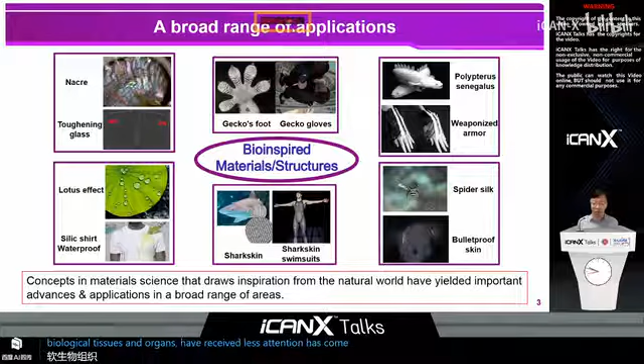On the other hand, the non-infectious chronic diseases have been the leading cause of deaths globally for many years. In 2012, these diseases caused 68% of all deaths, according to the report of the World Health Organization. In this regard, the long-term real-time monitoring of physiological signals is very crucial because they can provide quantitative feedback for the early stage prevention of these diseases. For this purpose, the functional devices are usually required to be conformably integrated with human organs. Therefore, the 3D functional microstructures with similar shapes and mechanical properties to those of biological systems can provide an important platform to interface and merge biology with physical components.

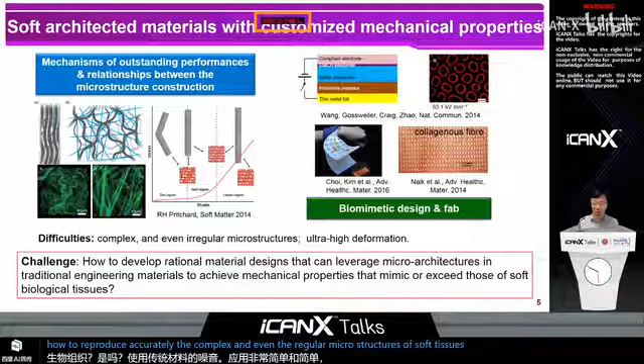One of the technological challenges we face is in the development of soft architected materials with customized mechanical properties. In particular, how can we develop rational material designs that can utilize microarchitectures in traditional materials so as to achieve mechanical properties that mimic or exceed those of soft biological tissues? It's noteworthy that by using conventional engineering materials, the fabrication is highly simplified and more straightforward. But the difficulties here include how to reproduce accurately the complex and even irregular microstructures of soft tissues, as well as how to understand the structure-property relationship.

Since the third dimension can provide brand new opportunities, 3D micro and nano electronic devices have already become an important research direction in the era of post-Moore's law. Here, a grand challenge is in the development of manufacturing approaches that can enable the formation of complex flexible 3D mesostructures in inorganic semiconductors and other high-performance materials. Single crystal silicon is a good example, which represents the hard material of the current information industries.

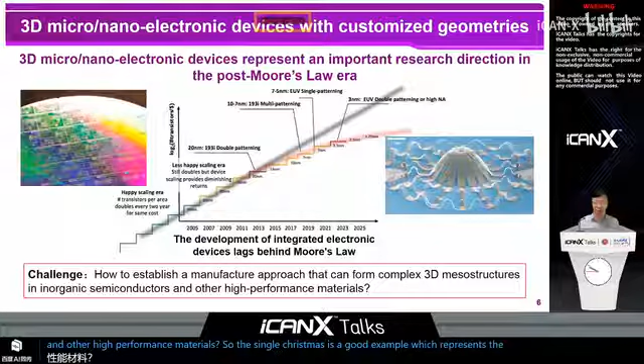To address these challenges, my group has been engaged in the development of flexible mesostructure technologies through the use of mechanics principles and highly interdisciplinary studies. According to these technologies, we have developed unusual soft architected materials that can reproduce and even exceed the mechanical properties of soft biological tissues. We have also developed a mechanics-guided assembly approach that can enable the construction of 3D flexible electronics with brand new functions.

Here I will start with the introduction to the soft architected materials with customized mechanical properties. In particular, we have developed a class of soft network designs and manufacture approaches. The key idea is to incorporate strategically designed filamentary microstructures into the lattice network and to utilize the composition design and geometrical optimization to tune the effective mechanical properties of the soft network.

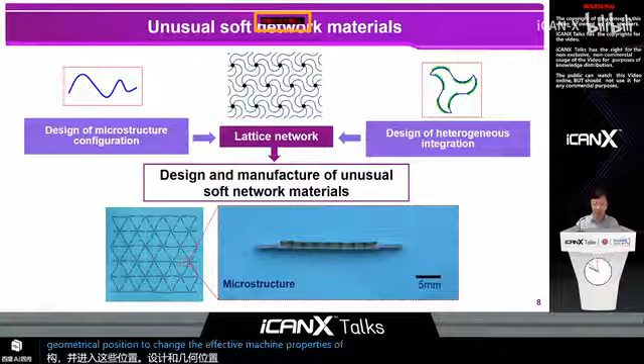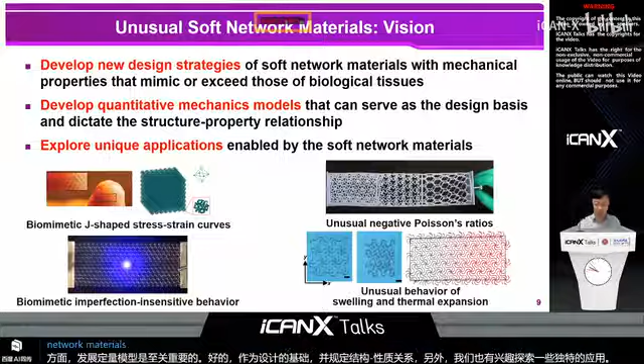On one hand, we have developed design strategies to achieve biomimetic properties as well as unusual properties that do not exist in natural materials. The examples of these properties include the biomimetic J-shaped stress strain curves, the imperfection-insensitive behavior, as well as unusual responses of swelling, thermal expansion, and Poisson's ratio. On the other hand, it is crucial to develop quantitative mechanics models that can serve as the design basis and dictate the structure-property relationship. Additionally, we are also interested in exploring some unique applications enabled by these soft network materials. Great. So let me first show you the bio-inspired network designs.

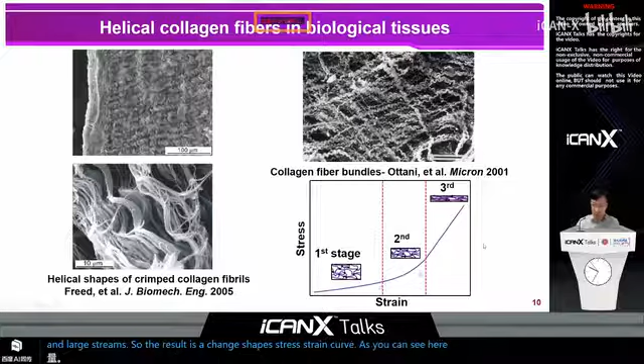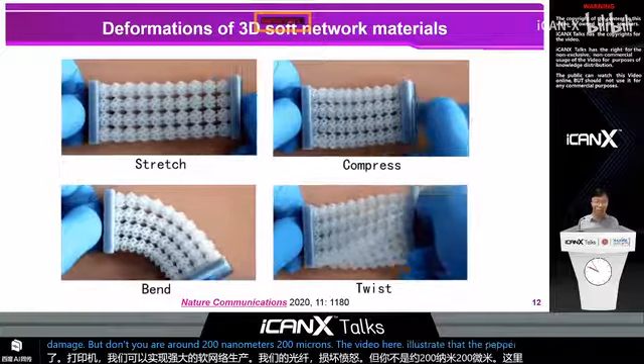So here, with the use of the commercial PolyJet 3D printer, we can achieve a robust production of the soft network materials with a fiber diameter down to around 200 microns. The video here illustrates that the fabricated soft network material can undergo large levels of stretching, compression, bending, and twisting. And during this loading and unloading process, the microstructure deformations are basically elastic and reversible, according to our mechanics modeling.

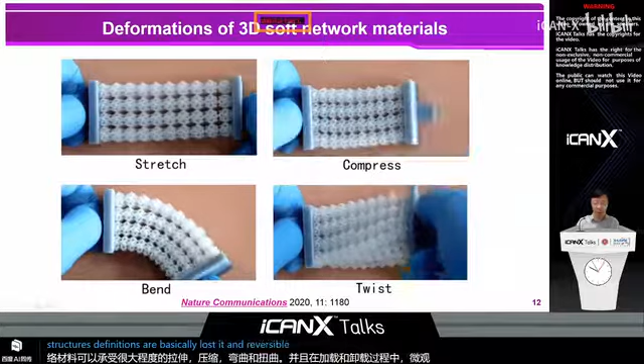Actually, this kind of soft network design can provide access to a broad range of J-shaped stress strain curves, and our mechanics modeling allows us a clear understanding of the structure property relationship. And with this, we can perform inverse design of the soft network material to reproduce accurately the stress strain curves of biological tissues. So here are 2 examples. On the top, if you look at the black curve here, this corresponds to the stress strain curve of a real heart muscle. The blue dots here represents the results of artificial tissues based on our network design. So you can see good agreements between our artificial tissues and the real heart muscle.

And on the bottom shows another example for the right ventricular myocardium of an adult rat. And here, the mechanical responses are very different between the circumferential and the longitudinal directions. And even for such anisotropic nonlinear stress strain curves, the artificial tissues based on our network design can still reproduce accurately the stress strain curves along both directions.

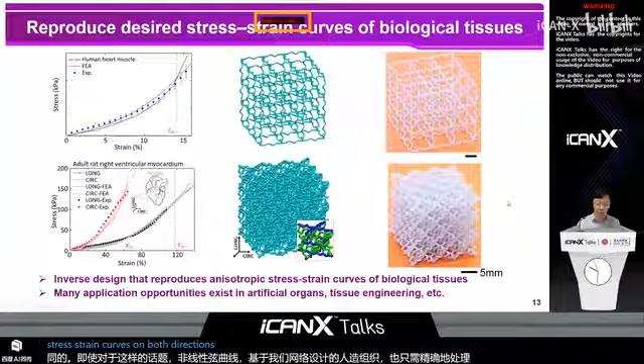If we degenerate the 3D helical structures into 2D, we are able to create a class of 2-dimensional network materials. And this kind of 2D network material can be tailored to reproduce the stress strain curves of film-like tissues, like animal skin. And this kind of 2D network material can be fabricated much more easily than the 3D networks. So excluding the 3D printing, the photolithography and the laser cutting technologies can be also used, and either the polymers or the metals can be exploited as a solid material. So here is an example of the fabricated network wrapped onto the tip of the thumb.

Actually, human skins show different mechanical properties at different locations or for people of different ages. For example, if you compare your skin at the abdominal region with your skin at your back, you will see that the skin at your abdominal region is much softer, and you need to apply a very large strain before it reaches its hardening region. Instead, if you stretch your skin at your back, you just need to stretch it very slightly, and then you will step into the hardening region. So it's a very big difference.

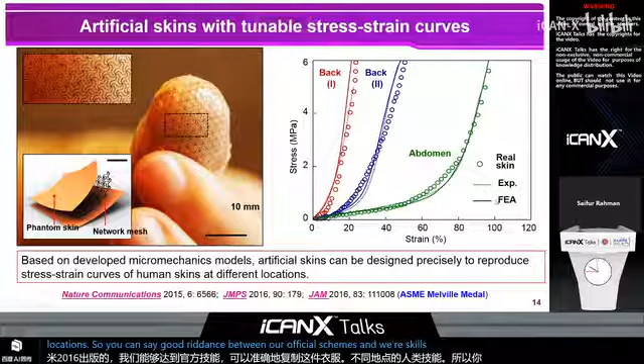So this kind of soft network material can be used in a skin-like ECG sensor to provide a good platform for stretchable biomedical devices. And by doing so, we can achieve not only a conformal contact with the skin, but also biomimetic properties. Another device demonstration is shown on the bottom. Here we can use the antenna to wirelessly control the release of responsive hydrogel into the surrounding tissues, into the surrounding environment. And here the mechanism is electromagnetic coupling.

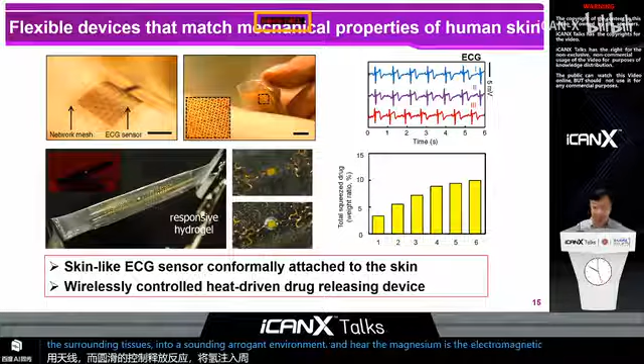Actually, this kind of soft network material also shows biomimetic imperfection insensitive behavior. We all know that with a brittle solid material, there will be a strong stress concentration around a hole. And this will result in a very big reduction in the strength, typically around 60% of the original strength for ideally brittle materials. And the stretchability is also reduced significantly. Here we show that even when we use the macroscopically brittle material to construct this soft network material, both the strength and the stretchability are quite imperfection insensitive.

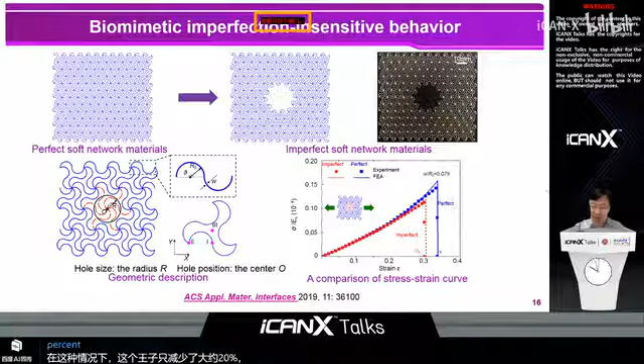So we have studied a range of different circular holes with different sizes and different positions, and here is a representative result. As you can see here, the blue color denotes the stress-strain curves of a perfect network material, and the red color denotes the stress-strain curves for an imperfect network with 6 missing microstructures in the center. In this condition, the strength is only reduced by around 20%, and the stretchability is reduced by only 10%. So in practical applications related to stretchable electronics, we usually want to utilize some holes in the network to accommodate some functional chips or other electronic components.

So here is the demonstration of a stretchable LED device based on the soft conducting network. And this device can offer a stretchability of around 14.2%. This value is very close to the 15% of the perfect network. And this device also offers very stable mechanical and electrical properties.

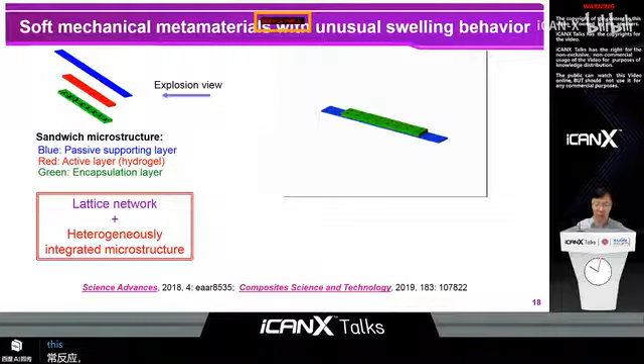Beyond the biomimetic properties, we also want to achieve some unusual properties that do not exist in natural materials. One of the properties we studied is the unusual response of swelling, such as a large negative swelling. This requires the material to shrink largely during water absorption. And here the key idea is to incorporate heterogeneously integrated microstructures into the lattice network. This video shows the construction of this composite network. In short, we want to devise a kind of filamentary microstructure that shrinks largely during water absorption.

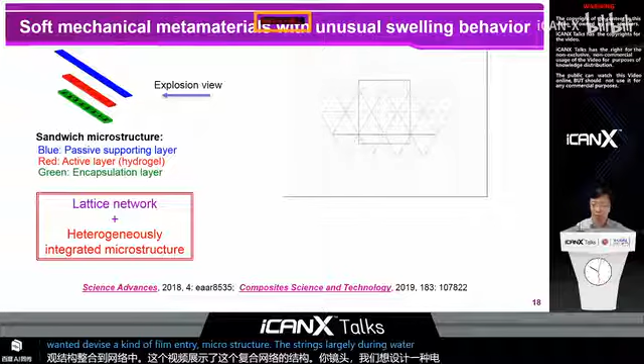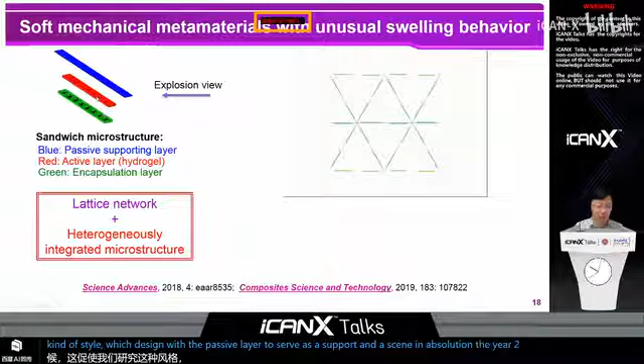And this drives us to look into this kind of sandwich design with a passive layer to serve as a support and a thin encapsulation layer to ensure a good interface between the hydrogel and the polymer support. Such a sandwich design can easily transform the swelling deformations of the hydrogel into large bending deformations, and therefore this can achieve a large reduction in the end-to-end distance. And this kind of composite network can be fabricated using a multi-material 3D printer. So you can use a commercial 3D printer to achieve this production.

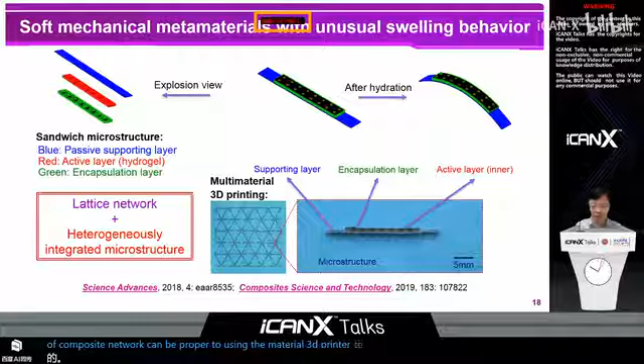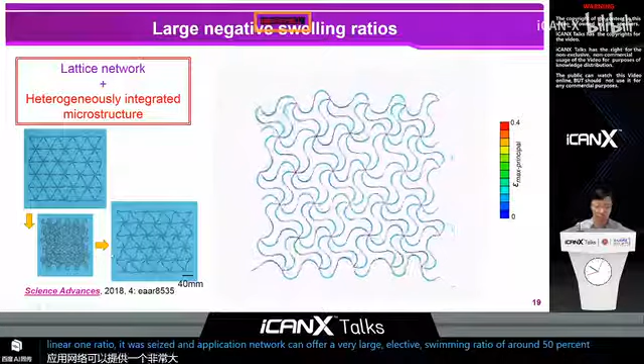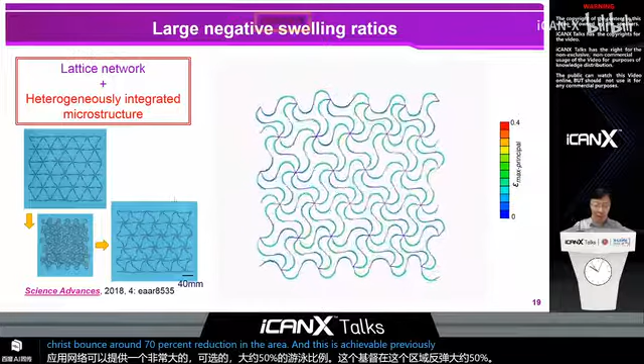And this slide shows the simulated deformation process during water absorption and dehydration. You can see the predicted deformed configurations agree very well with the optical images in experiments. And if you calculate the value of the linear swelling ratio, you will see that this fabricated network can offer a very large negative swelling ratio of around 50%. This corresponds to around a 70% reduction in the area, and this was unachievable previously. And when you do dehydration, this kind of structure can recover almost fully to the initial state. This indicates good reversibility.

Good. And based on this kind of soft network design, we are also able to achieve anisotropic swelling behavior by using heterogeneous microstructures in the network. So here is an example. If you put hydrogels only along the diagonal directions, you can achieve a kind of unidirectional shrinkage along the x direction and no shrinkage or expansion along the y direction.

If you describe this kind of swelling path in the space of strain components, epsilon x and epsilon y, we can do a comparison between the current metamaterial design with the traditional engineering materials as well as previous metamaterial design. So actually, the traditional engineering materials only offer a very small magnitude of swelling ratios, typically within this region. The well-synthesized hydrogels can offer very large swelling ratio. It can go beyond 150%, but typically in an isotropic manner. So it is in this path.

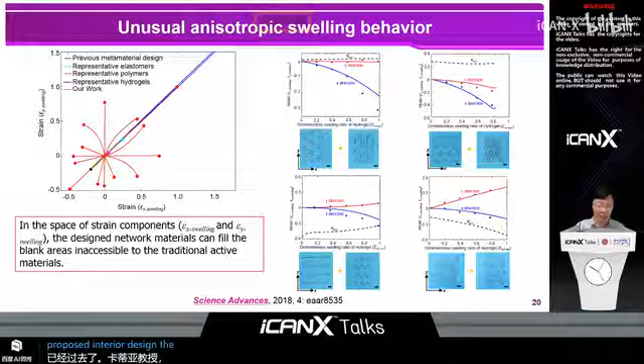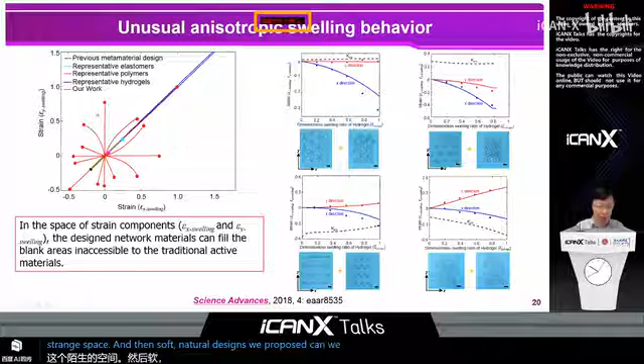Professor Katia Bertoldi's group at Harvard proposed a metamaterial design that can achieve an isotropic effective swelling ratio of around 20%. Therefore, there are many blank areas in this strain space, and the soft network designs we propose can well fill almost all of those blank areas. So this indicates the capability of our soft composite network design.

The above design concept of heterogeneously integrated soft microstructures can also be extended to achieve unusual modes of thermal expansion. Here you need to introduce two materials with a relatively large difference in the coefficient of thermal expansion. And we choose PI and PMMA as the two constituent materials. And in terms of the fabrication, it could be a challenge, especially when you want to achieve a very small feature size of around several tens of microns. But due to the time limit, I will skip the details of the fabrication and just show you some results.

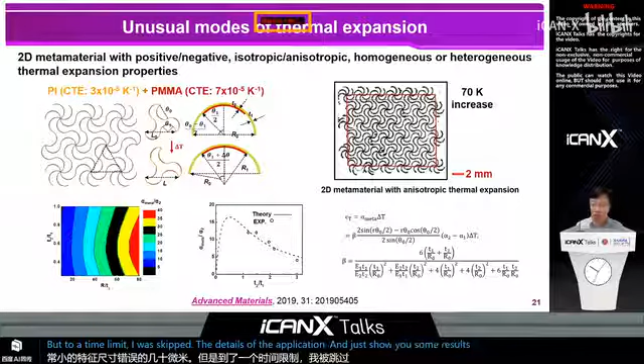So on the right, you can see this kind of metamaterial that can achieve a unidirectional thermal expansion. So there is no shrinkage or expansion along the horizontal direction. By introducing some non-uniform arrangement of the microstructures, we can also achieve this kind of thermally induced pure shearing, rotation plus shearing, as well as thermally induced bending. And most of these behaviors do not exist in natural materials as well.

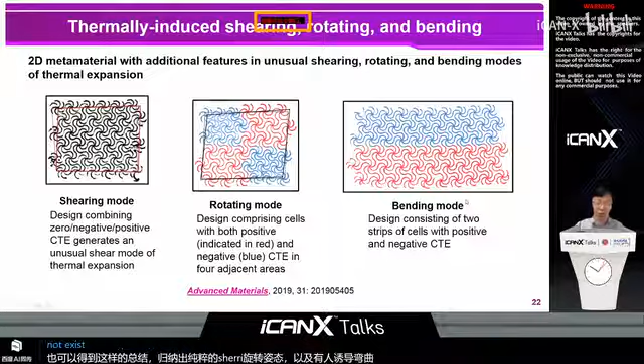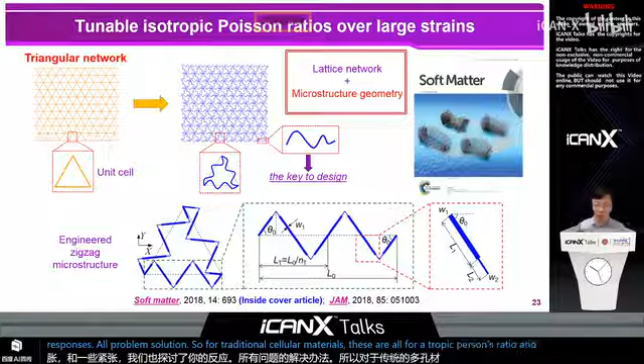Excluding the unusual responses of swelling and thermal expansion, we have also explored the unusual responses of Poisson's ratio. So for traditional cellular materials, they either offer isotropic Poisson's ratio at small strains or anisotropic Poisson's ratio at large strains. And it's very difficult to combine the two features together in a tunable manner. So here we have proposed to incorporate arbitrarily shaped microstructures into the lattice network, which allows us to achieve tunable isotropic Poisson's ratios at large strains.

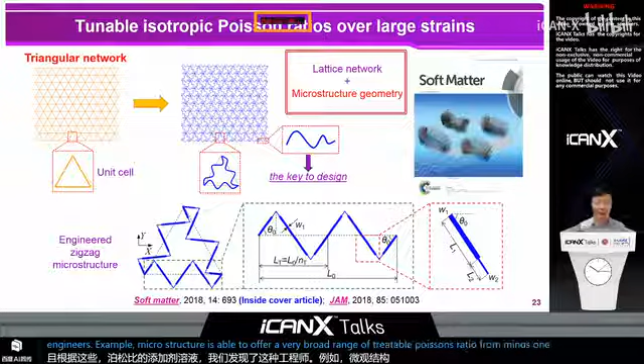And actually, we have developed a mechanics model that gives an analytical solution to the linear Poisson's ratio for this general network material. And according to this analytical solution of the Poisson's ratio, we found that this kind of engineered zigzag microstructure is able to offer a very broad range of tunable Poisson's ratio from -1 to 1 in an isotropic manner. And this is also unachievable previously. Let me show you a video about what we can achieve.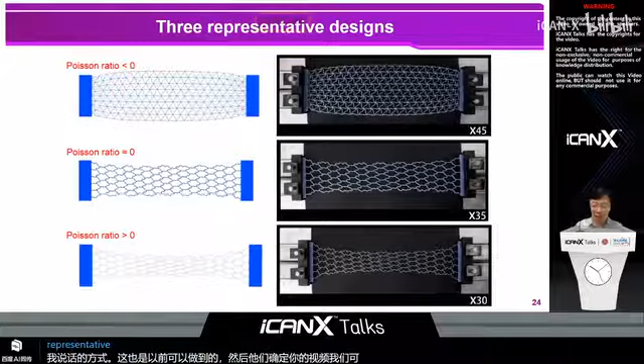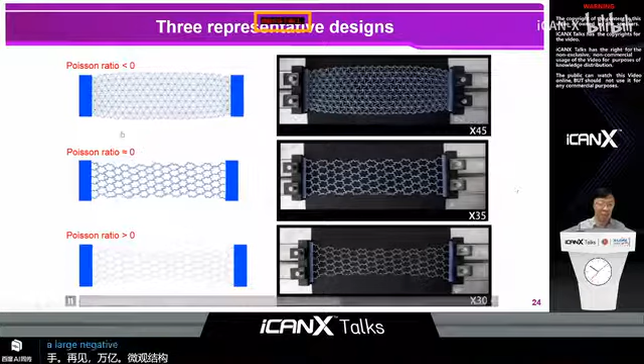And here are 3 representative designs we studied both experimentally and theoretically. So by tuning the microstructure geometries, we can achieve a large negative Poisson's ratio of -0.5, 0 Poisson's ratio, as well as a positive Poisson's ratio of about 0.5.

And with this network design, we are also able to achieve a kind of artificial cat skin. So here we find that the cat skin at a certain location also shows a kind of negative Poisson's ratio, as you can see here. And by using our soft network design, we can reproduce not only the nonlinear transverse strain, but also the J-shaped stress strain curve of real cat skin.

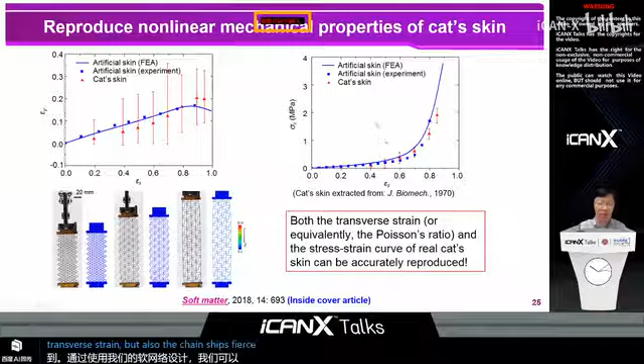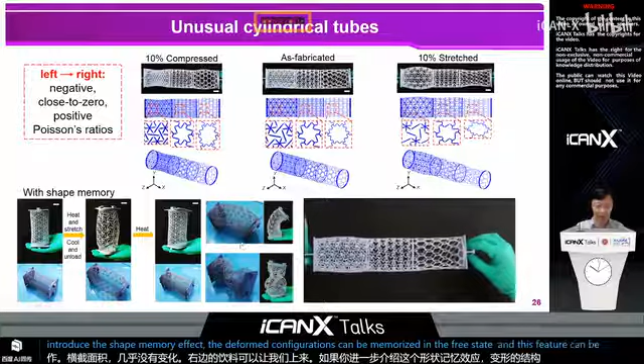And this slide shows the use of this soft network material to create an unusual cylindrical tube. So for this kind of cylindrical tube, when you stretch it, the left segment expands in the cross-section, the middle part keeps the cross-sectional area almost unchanged, and the right part shrinks along the circumference. If you further introduce the shape memory effect, the deformed configurations can be memorized in the freestanding state. And this feature can be utilized in thermally-triggered medical stents.

Okay, I will give a short summary of the first part of the lecture. So in conclusion, we have incorporated strategically designed microstructures into the lattice network with proper geometries and heterogeneous integration. And the result is a class of soft network material designs that can achieve both biomimetic properties and unusual properties of swelling, thermal expansion, and Poisson's ratio. We believe that there are many application opportunities in biomedical devices and tissue engineering.

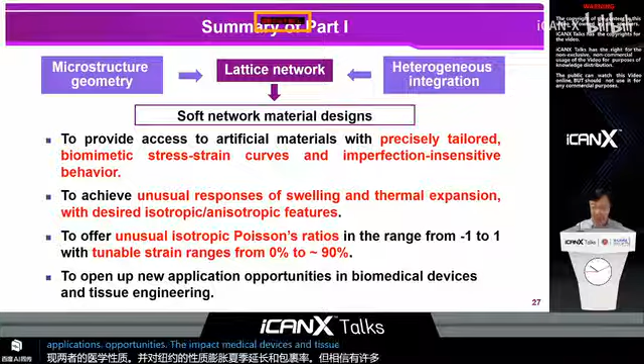Then it comes to the second part of the lecture. And here, an important mission is to address the challenge in the fabrication and manufacture of flexible 3D microelectronics. To address this challenge, we started relevant studies from 2012, and now we have established an approach distinct from all of the previous ones. So the key idea is we did not abandon the well-established microelectronic technologies. Instead, we go one step further beyond the traditional 2D fabrication, and we exploit the compressive buckling to deform easily patterned 2D thin films into well-controlled 3D architectures.

After devising this approach, an important aspect involves the exploration of the class of 3D geometries accessible to this mechanics-guided approach. Another fundamental question is, how can we develop quantitative models that can serve as the basis of inverse 3D design? In addition to developing the approach itself, we are also interested in exploring the unique applications enabled by this approach. So I will illustrate the process of this assembly on this slide.

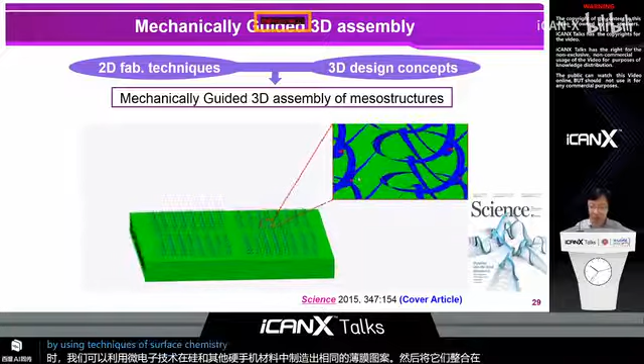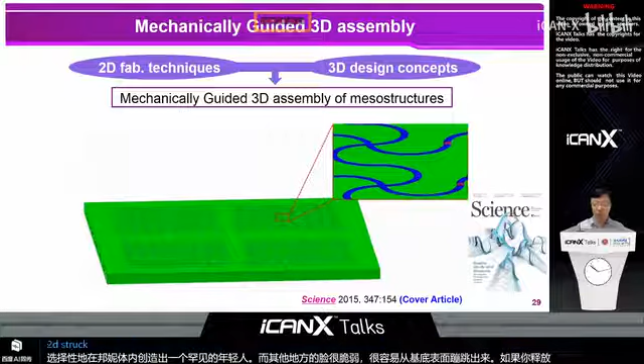Firstly, we use a soft elastomer to serve as the platform, and we apply a biaxial pre-stretch to the substrate. And this platform will provide the forces required to induce the compressive buckling. Meanwhile, we can use the microelectronic technologies to create patterned 2D thin films in silicon and other high-performance materials, and then we integrate them together. And by using techniques of surface chemistry, we can create strong covalent bonding selectively only at the bonding sites. The other places are simply weak interface and can pop up easily from the substrate surface if you release the pre-strain in the substrate. And then the 2D structure can be transformed into well-controlled 3D architectures. Since the microelectronic technologies can do mass production and thousands of components can be fabricated on the same batch, our 3D approach can also assemble thousands of 3D mesostructures at the same time.

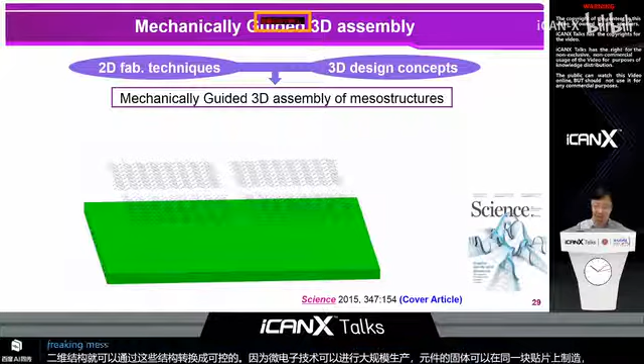A powerful aspect of this approach is the broad range of applicable material types. In addition to the single crystal silicon, this approach also works well for metals, polymers, plastics, ceramics, piezoelectric materials, as well as flexible printed circuit boards. So if you do two-dimensional fabrication of the integrated circuits, the entire circuits can be transformed into 3D at the same time.

Another powerful aspect of this approach is the broad range of applicable length scales. So unlike most of the other approaches, this mechanics-guided approach works perfectly well over a wide range of length scales, from submicron scale to meter scale. In order to provide some intuitional impressions, we compare our assembled structures with some objects in real life. So here, the assembled structure at the submicron scale has a comparable dimension to blood cells. Adjacent to this microscale 3D structure sits a human hair. So you can see a human hair here. For millimeter and centimeter scale structures, we use a coin and a pen as a reference respectively. And the rightmost panel shows the largest structure we have achieved, which is comparable to a human body.

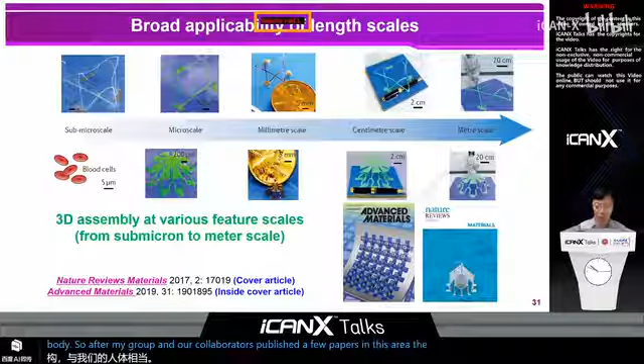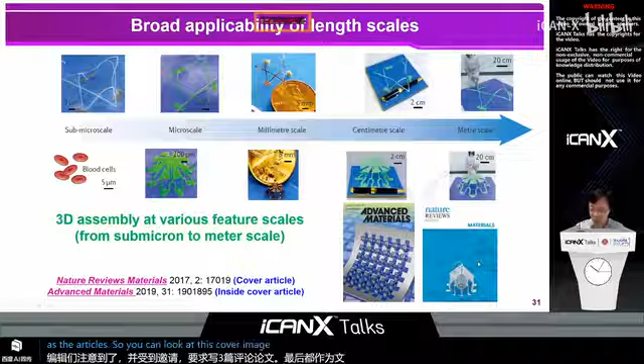So after my group and our collaborators published a few papers in this area, these works were quickly noticed by the editors of Nature Reviews Materials and Advanced Materials. And they invited us to write 2 review papers, and both were eventually published as cover articles. So if you look at this cover image, you can see that we actually use a kirigami design to achieve this tiger at the micro scale. You can imagine that this tiger is completely flat at the initial state, and we simply use the compressive buckling to trigger its pop-up into this tiger at the micro scale.

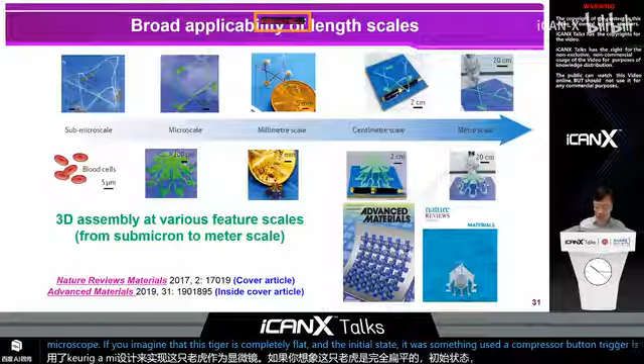In this direction, the research of my group over the last few years has been focusing on 4 different aspects, including conceiving some new design concepts, developing robust design methods, inventing assembly instruments, as well as exploring new applications. In specific, the design concepts involve the designs of 2D precursors, the design of deformable substrate, and how you integrate them together. The development of design methods aims to answer the question of how to map the target 3D configuration onto the initial 2D patterns. The assembly instruments involve the loading and characterization of the soft-hard interface, the multi-field assembly, as well as nanoscale assembly. And in terms of the applications, we have explored the development of unusual electromagnetic devices, MEMS, and biomedical devices. So due to the time limit, I will show you some representative results in these different aspects.

Okay, after we published the first paper of this area in Science in 2015, an intuitive idea is to introduce and extend this idea to the assembly of 3D membranes or 3D curvy surfaces. However, we noticed that a simple extension might cause some unexpected issues, as shown on the left of the slide. So if you put 4 bonding pads uniformly around the boundary of a circle or a square, you will observe evident localized deformations in the central area of the structures. This will result in strong strain concentration. And in this case, if single crystal silicon is used for the fabrication, then the structure will break because the peak value of the maximum principal strain is much higher than the fracture limit of silicon, which is around only 2%. So to address this issue, we introduced the design concepts of kirigami to change the load transfer path within the structure. So as you can see here, the localized deformations disappear and the strain concentration is relieved evidently.

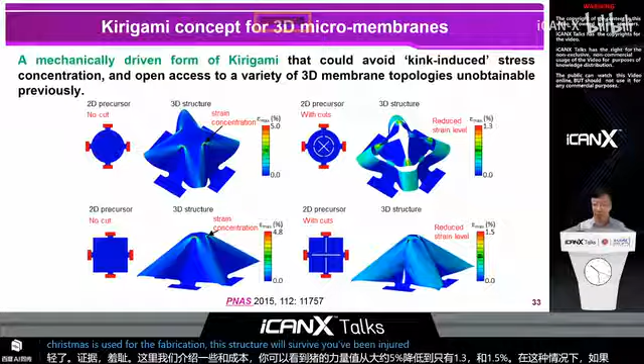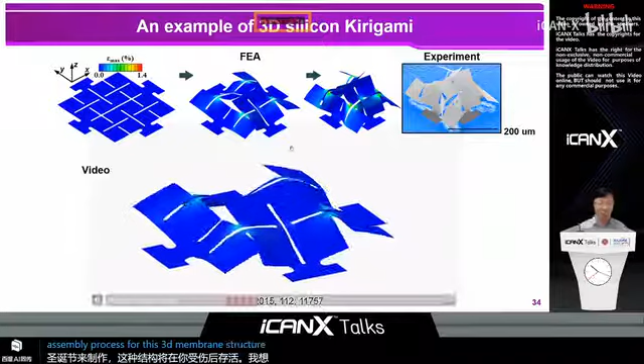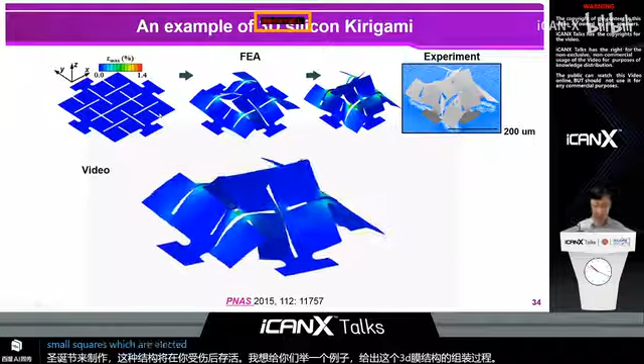Then I would like to show you an example that illustrates the assembly process for this 3D membrane structure. Here we actually use a set of fractal crosscuts that divide this large square into 16 small squares, which are interconnected with each other. So here, this video shows the deformation process to result in this final 3D membrane structure. And this prediction agrees very well with our experimental results. So you can see here, this mesostructure has a lateral dimension of only around 200 microns, and the thickness of the silicon is only around 300 nanometers.

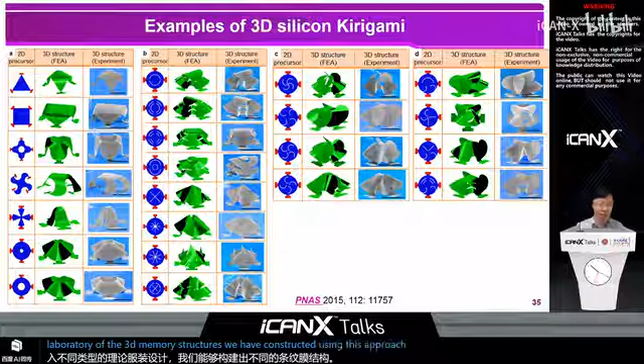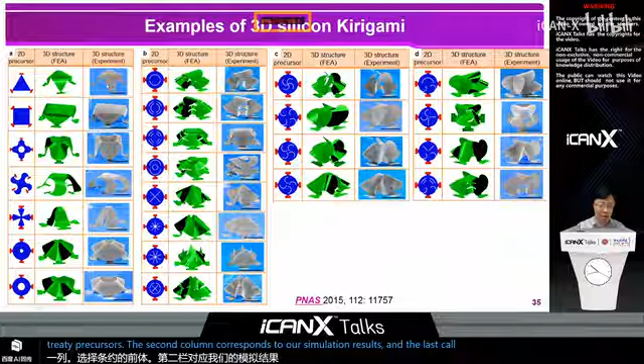By introducing different types of kirigami designs, we are able to construct a diversity of 3D membrane structures. And here is the library of the 3D membrane structures we have constructed using this approach. And here, the first column of the table shows the 2D precursors. The second column corresponds to our simulation results. And the last column, and you can see good agreements between our prediction and the experimental results for all of those designs.

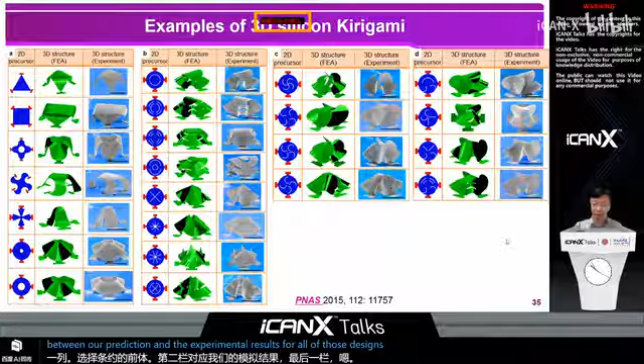Okay, you may notice that the 3D structures I just showed you are mainly in the ribbon shape or the membrane shape. And these structures are formed mainly by the bending deformations or twisting deformations. If you think about the origami techniques, an ancient art originated from China and Japan, you will see that many interesting 3D sculptures can be created using paper origami. The key to this technique is to form creases and folding deformations in a controlled manner. But at the micro scale, you cannot use your hand to fold those structures, right? So it literally brings us a question: can we generate similar folding deformations during the process of compressive buckling at the micro scale? And if so, how can we achieve it?

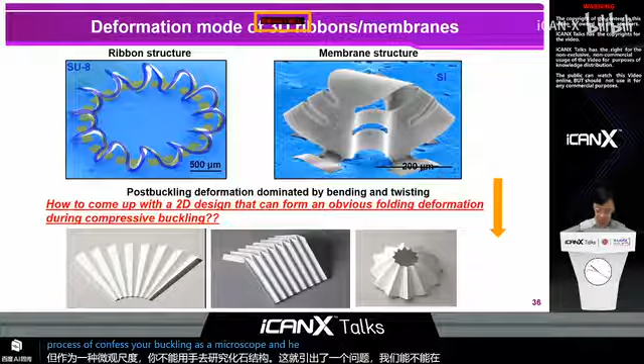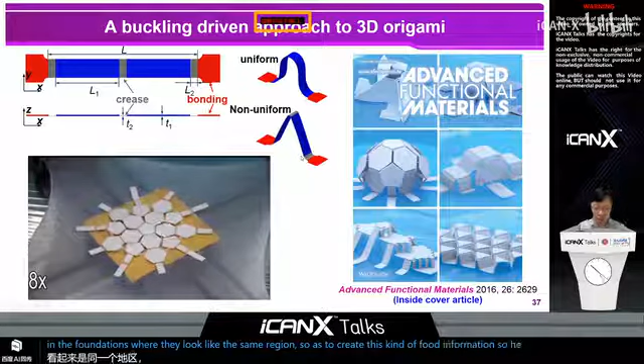Actually, we propose a very simple strategy by use of the non-uniform thickness distribution in the 2D film. Specifically, we make the 2D film much thinner at the gray region so as to reduce the local stiffness. You can imagine that this gray region has a thickness of 1/10 of this blue region. Then during the compression, the bending deformations will be localized at the thin region so as to create this kind of folding deformations. So here we can do a comparison. If you use the uniform thickness design, then the deformation is rather smooth as shown here. But when you do this non-uniform thickness design, we can achieve this kind of folding deformations.

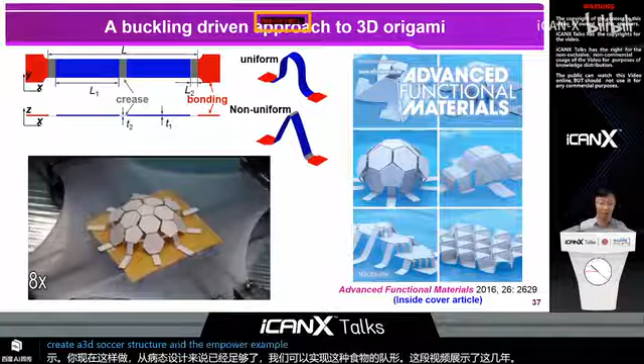And this video shows the use of this idea to create a 3D soccer ball-like structure. And the entire assembly process is completely reversible. And excluding this soccer ball structure, we can also achieve this car structure, windmill, pyramid, and many other origami structures.

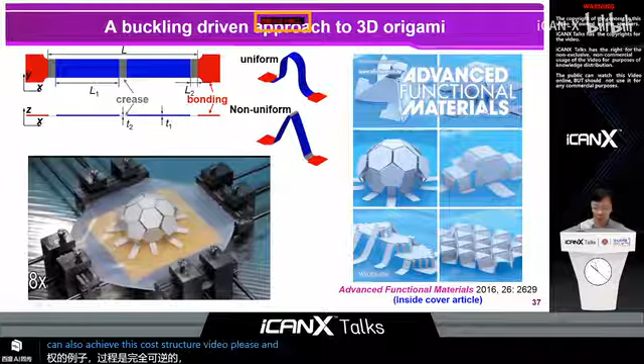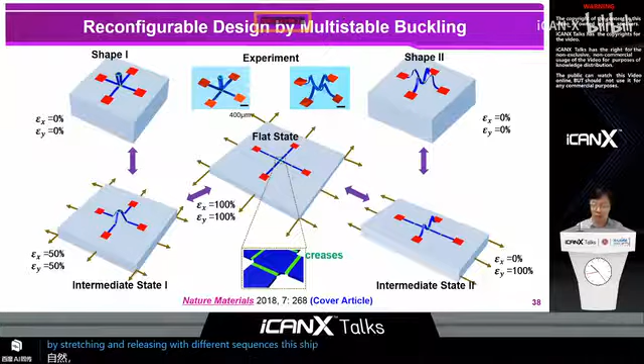And actually, by stretching and releasing with different sequences, this shape 1 and shape 2 modes can be reshaped into each other reversibly. And actually, our microscopic experiment validates this idea, as evidenced by this good agreement between our experiments and our predictions of the 3D configurations.

When you do the simultaneous release of the pre-strain, you get an octopus structure. But when you do sequential release, you will get a spider structure. And actually, this octopus structure can be reshaped reversibly into this spider structure. This kind of reconfiguration process is unachievable using the previous techniques. And such a reconfiguration process was luckily selected as a cover of Nature Materials in 2018.

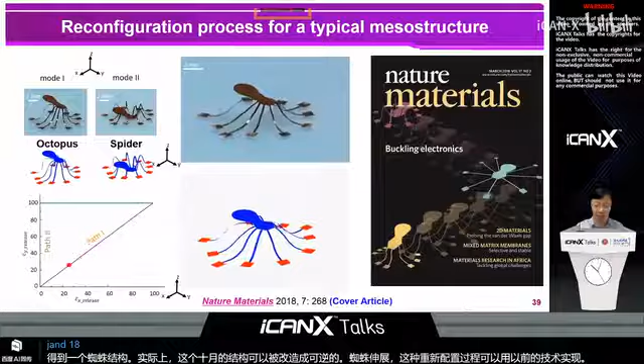To provide a design basis, we have used the finite element simulations to establish a phase diagram to show the buckling modes for sequential release along all possible loading directions, as shown here. So here, the green color corresponds to mode 2, and the yellow color corresponds to mode 1.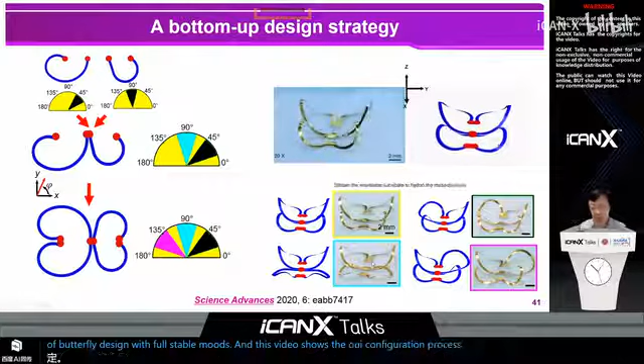If you further mirror this pattern, we will get this kind of butterfly design with 4 stable modes. And this video shows the reconfiguration process for this multi-stable structure. And the 4 different stable modes are shown here.

According to the above introduction, you can find that this kind of 3D assembly actually corresponds to a process of post-buckling deformations in thin film structures. To establish a theoretical basis of this 3D assembly, we need to first solve the forward problem, which is how to predict nonlinear post-buckling deformations for prescribed 2D precursors. And for this purpose, we have developed both energetic models and perturbation methods for the post-buckling analysis.

In particular, for this double perturbation method, we introduce two perturbation parameters to linearize the nonlinear governing equations, from which analytical solutions can be obtained for general ribbon shapes. And here, one of the perturbation parameters is related to the magnitude of deformation, which is widely used in the conventional perturbation method. And the additional perturbation parameter we introduced relates to the flexing level of the initial 2D ribbons. And as you can see here, the analytical predictions agree very well with our experimental results and simulation results.

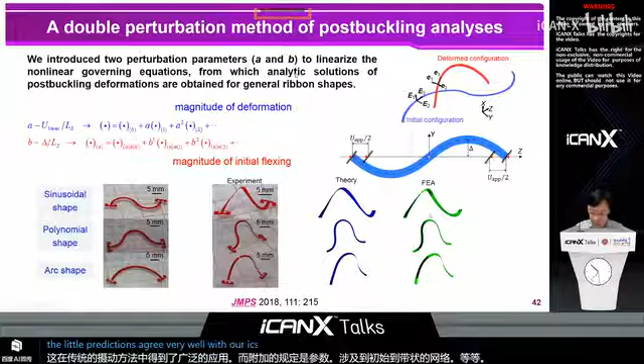After solving the forward problem and gaining some insights into the 2D, 3D relationship, we eventually want to establish robust inverse design methods. Specifically, how do we determine the initial 2D precursors, the bonding size and the pre-strain level for a target 3D configuration? And this can be regarded as a type of optimization problem, and different algorithms can be exploited.

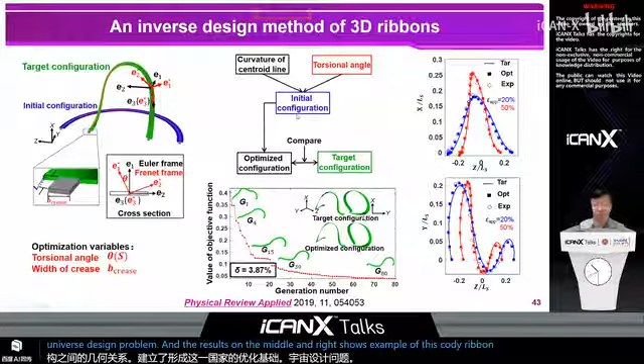So my group has proposed the use of an adaptive genetic algorithm to solve the inverse design problem for the 3D ribbon structures. And based on a theoretical analysis for the geometrical relation between the deformed and the initial ribbon structures, we developed an optimization-based formulation of this inverse design problem. And the results in the middle and right show an example of this curvy ribbon optimized from the target.

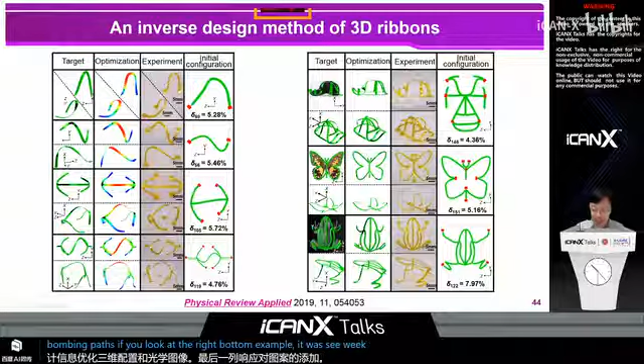And this slide provides some examples of inverse design through this optimization method. Here, the first column corresponds to our target configuration. The second column and third column show optimized 3D configurations and optical images based on this proposed inverse design method. And the last column corresponds to the initial 2D pattern with the red color denoting the bonding paths. If you look at the right bottom example, you will see we can extract the key ribbon sketches of a frog as our design target. And here the experimental results indeed reproduce well this desired 3D configuration.

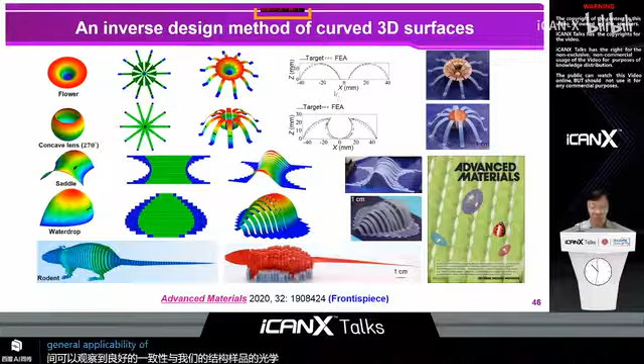Then in terms of the diverse driving forces of the 3D assembly, we have explored a few different options in addition to the pure mechanical forces. And here I want to choose the electromechanically controlled assembly as an example for illustration. In particular, we propose to use dielectric elastomers to serve as a substrate. And we know that the dielectric elastomers sandwiched between two compliant electrodes can be used as an actuator. This is because of the attraction of the opposite charges. And such an electrical actuation can be utilized to drive the 3D assembly, as you can see here. So the expansion of the electrode area can trigger the deformation of the 2D thin film into the desired 3D configuration.

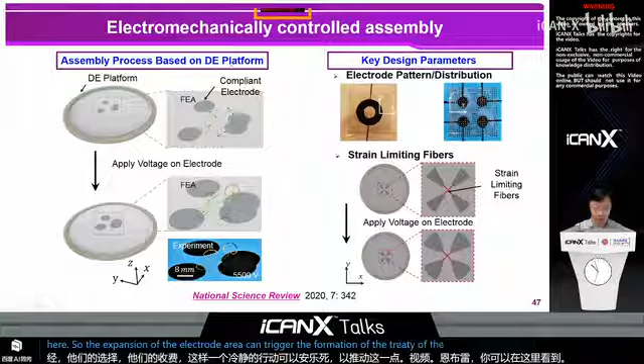On the left of this slide shows two examples of the electrically controlled assembly, including a frog-like structure and a bistable mesostructure. So here, if you look at this video, you will see the formation of a pop-down mode if you do this loading path 1. This is the loading path 1. But if you do the loading path 2, then you will get a different 3D shape with a pop-down, pop-up mode. And this pop-down and pop-up mode can be reshaped quickly between each other.

And this electrical loading can be combined with the mechanical loading to achieve a rapid reversible reconfiguration for the 3D structure. So in short, you can mechanically assemble this dome structure first, and then you can apply voltage to achieve the reconfiguration process. So here are two videos. And this reconfiguration can be completed very fast, in just 1 second. So it's a very fast reconfiguration process.

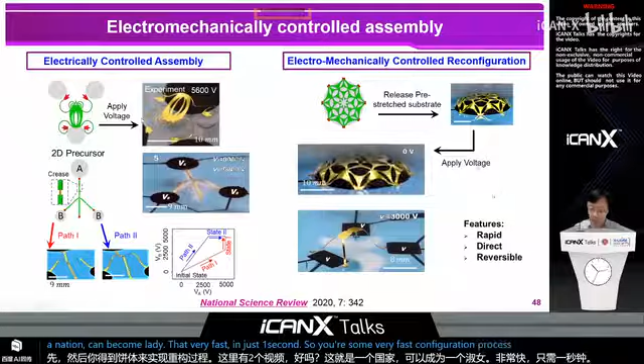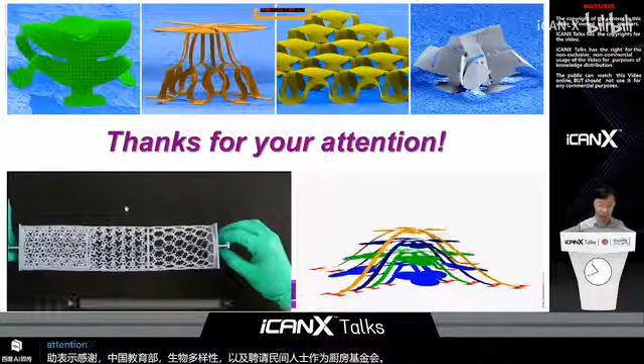Thanks for Professor Yihui Zhang's very wonderful talk. And we already received several questions for you. Are you prepared for it? Sure. Okay, I will go through.

The first one is: thanks for the wonderful speech. It's a very great talk with so many dedicated architecture materials and structures. The question is, I would like to ask whether 3D printed materials have biological properties in the field of artificial organs, such as biocompatibility, biodegradability, or self-growth characteristics. That's a very interesting question. Okay, this is a very good question.

Actually, the soft network material designs we have introduced today can apply to a range of different materials, including biocompatible materials, polymers, metals, and many other different materials. No matter what kind of materials you use, the soft network designs can offer the kind of biomimetic J-shaped stress-strain curves and many other different mechanical properties. So you can utilize the recently developed 3D printing techniques of biocompatible materials to fabricate those soft network materials. And in that case, the resulting 3D network materials will offer the required biological properties you need. And the commercial 3D printer usually does not offer this kind of bio-related properties.

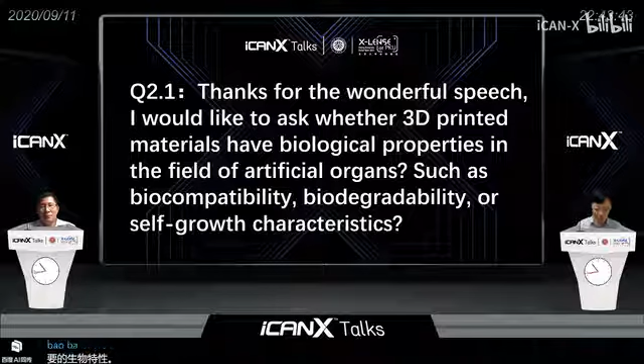Okay, great. I think there are already some bio 3D printers which can print bio tissues and also hydrogel materials. Maybe they can be combined with your research. Okay, let's go to the second question. You use the water swelling or thermal expansion method to deform the 2D metamaterial. How is the deforming speed? Have you thought to use a magnetic or electrical method to actuate the deformation?

Yeah, this is a very good question. Very good points. Actually, if we use water swelling, then it's quite slow, and the entire deformation process can take around 1 hour or several hours to complete, depending on the specific designs you use. But for the thermal expansion, if you use the electrically controlled heating, then the process can be quite fast, which takes just several seconds to complete.

And for the second point of your question, yes, indeed, we have tried to use some magnetically controlled method to deform these responsive materials, and our ongoing projects still take several additional months to finish. And it's very interesting. By using the magnetic control, we can control the structure wirelessly. So that's a good advantage of using the magnetic control. And for the electrically controlled method, we have actually used this kind of control in the thermally controlled metamaterials. And in today's talk, I did not have enough time to expand on that topic.

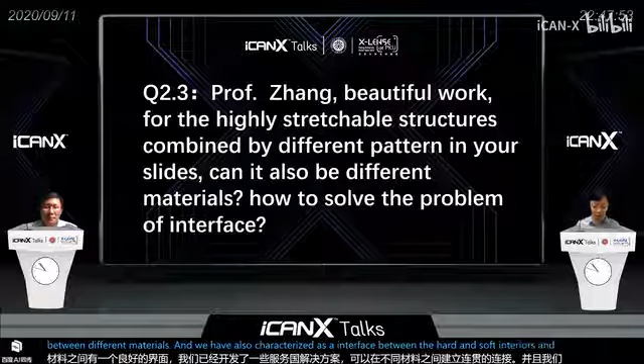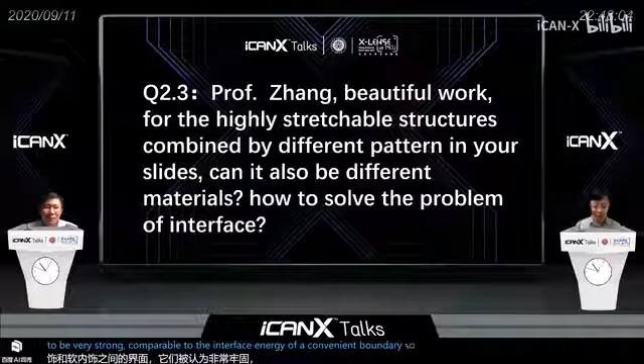Regarding the interface, there will indeed be an interface between the hard material and the elastomer substrate. To ensure a strong interface between the hard material and the soft material, we have developed some surface chemistry techniques which can create covalent bonding between the different materials. And we have also characterized the interface between the hard and soft materials, and it is very strong, comparable to the interface energy of covalent bonding. So I think this is also not a hard problem, and it can be solved.

Okay, let's go to the fourth question. Hello, Professor Zhang. I want to know what are the applications of the structure with different regionalized Young's modulus? Okay, this is also a very good question, and I think it is related to the responsive mechanical metamaterials in our study.

In that part, we can change the configuration of the microstructures in the metamaterial so as to change the mechanical properties of the metamaterial. And by using materials with different mechanical properties, it can have important implications in soft robotics. In soft robotics, there are many scenarios where the robot needs to be hard or soft to confront different application scenarios. I think this is a good application scenario for this kind of material. Thank you for this question.

Okay, a follow-up with this question. Yihui, you talk about soft robotics. It definitely is a very good application field. But my question is that you have to rely on your substrate, right? Stretching your structure cannot leave your substrate, right? Actually, we can separate our 3D structure from the substrate, but due to the time limit, I do not have time to introduce the techniques we developed in this area. We can use either metal plasticity to memorize this 3D shape, or we can also use shape memory polymers in our technique to memorize the permanent 3D shapes. So we can achieve this.